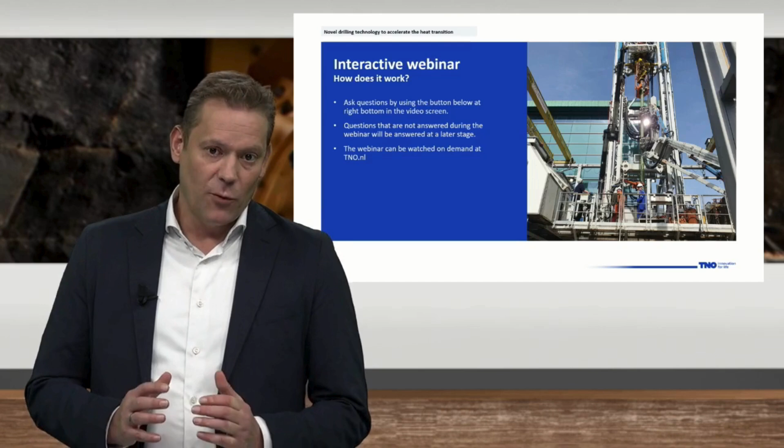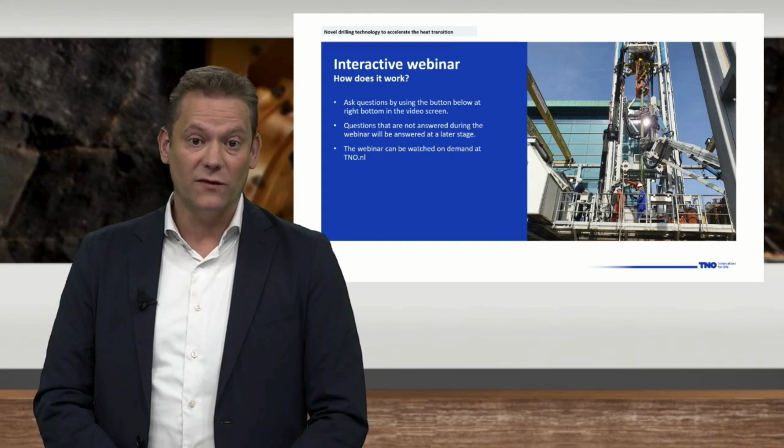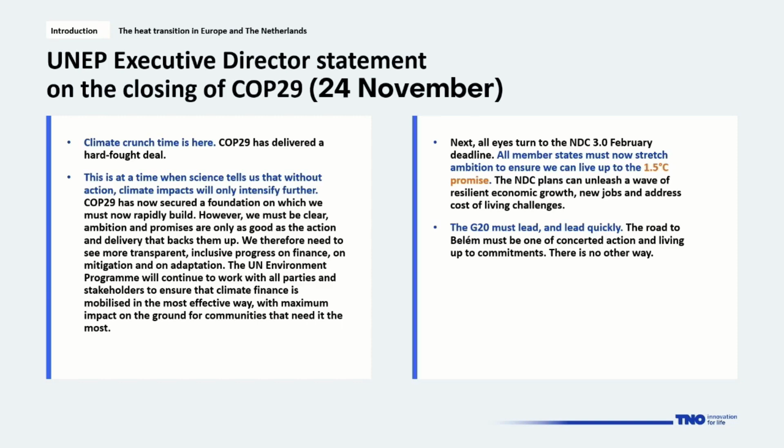So I would like to start with scoping a little bit on why we're having this webinar today, and talk about the heat transition in Europe and the Netherlands. Last week we saw the closure of COP29, and although there were some heavy debates about who's going to pay for what measures throughout the world, I think there's a general consensus that we need to take actions regarding the climate, and that we need to shift from oil and gas towards more renewable resources for our energy.

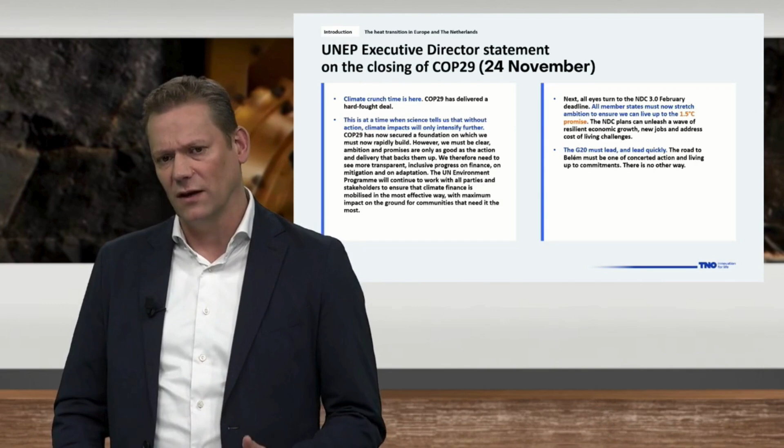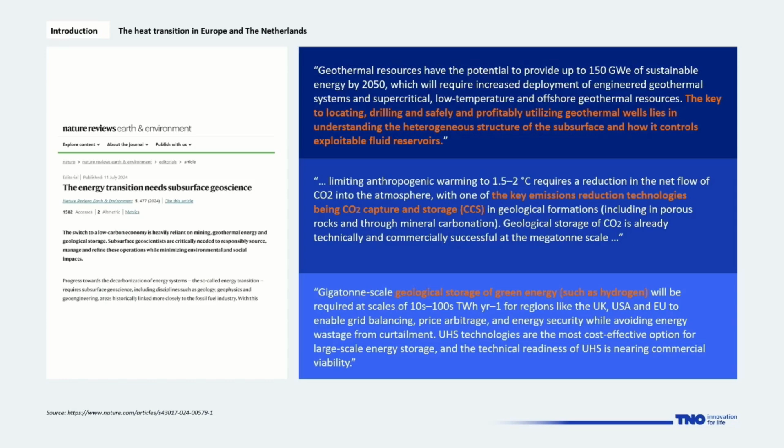With that, there was also a call for action to take steps towards the production of energy. I would like to point out this editorial paper from Nature, which clearly states that we need the subsurface, and we need the geologists and engineers who work in the subsurface to bring us all the requirements that we need for this energy transition. That can be in the part of mining for critical raw materials, but also the topic we're discussing today: CCS, hydrogen storage, the storage of heat, and of course geothermal.

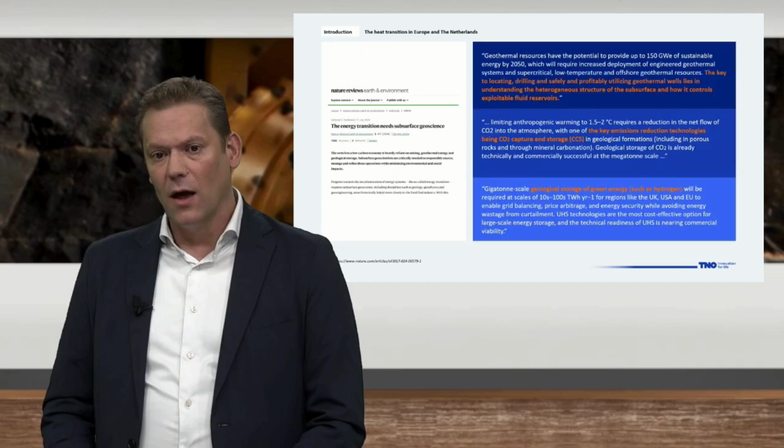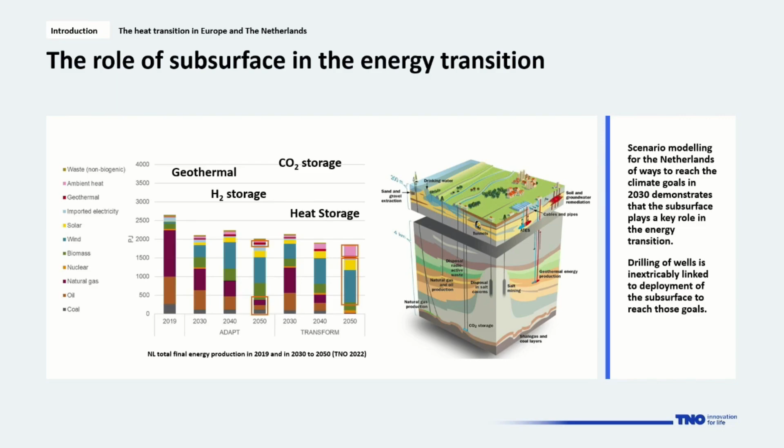We're based in the Netherlands, and if we look at the situation here, some colleagues of mine have done the modeling on what it actually takes to reach the agreed targets for the Paris Agreement. If you take the subsurface out of the equation, there's just no way we're getting towards the goals that we need. So we need the whole portfolio of options that the subsurface can offer, whether that's geothermal, hydrogen storage, carbon dioxide storage, or heat storage.

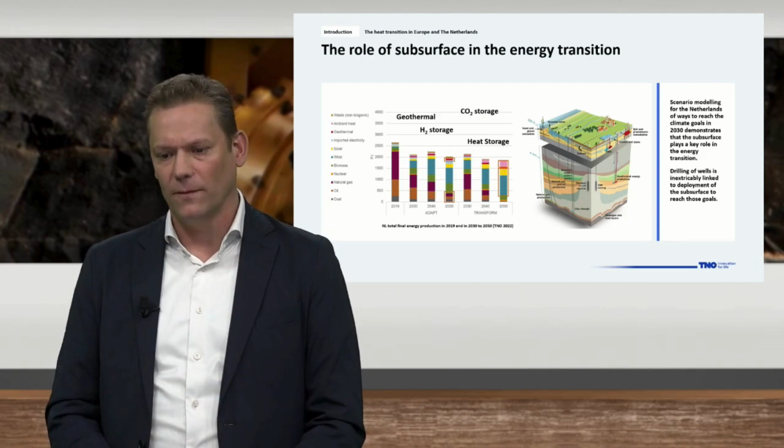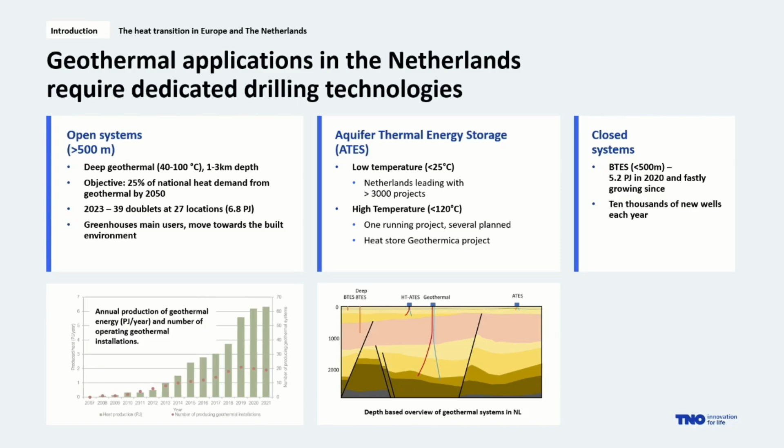If you zoom in a little on the geothermal situation we have in the Netherlands at the moment, we can see several options and technologies being deployed. On one end there are the open geothermal systems, which in the Netherlands are usually at a depth of around 2 to 3 kilometers. On the other hand, there's a major effort in developing ATES systems, the aquifer thermal energy storage systems, usually developed at a depth of around 200 meters, but sometimes slightly deeper.

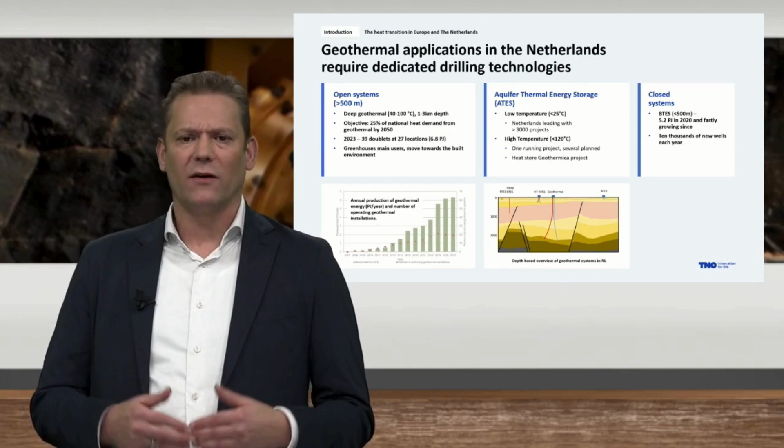And we have the closed systems, the BTES systems, developed for the most part now down to around 150 meters, though some developments take this deeper. What these three things have in common, although they're all part of the geothermal family, is that they all require quite specific drilling technologies and techniques. With that, I'd like to point out that drilling as such is not new.

We've been drilling as an industry for decades, even going back millennia, to when the first drilling operations took place in China. In recent years, we've drilled further, drilled deeper, drilled complex reservoirs, and so on.

But what we're facing now is a bit of a scope change towards carbon dioxide, hydrogen, and heat. What these technologies also have in common is that the business cases are more marginal than we're used to in oil and gas. So in terms of competition with oil and gas, for the energy transition we probably need to be more competitive in other ways, which means we require new developments dedicated towards the purposes that are requested.

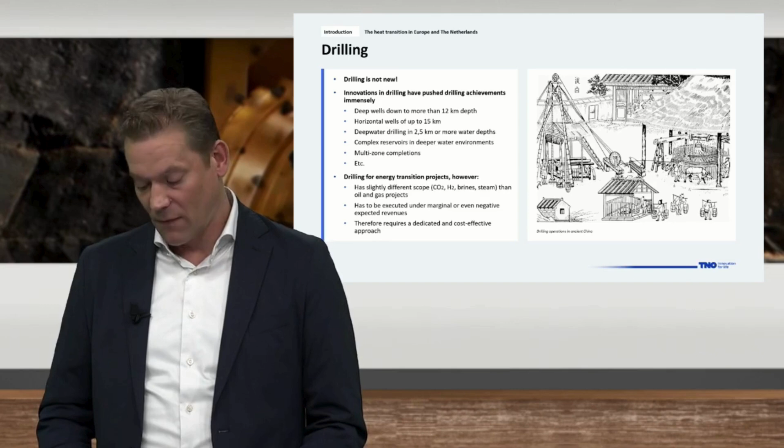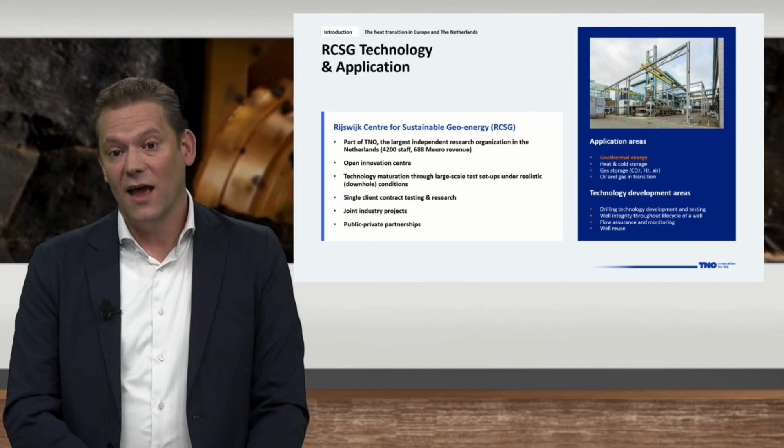So with that, I'm representing here the Rijswijk Center for Sustainable Geoenergy, and what we try to do is accelerate the implementation of new technologies for the energy transition. We do that by experimental testing at a one-to-one scale, and from that research some of the topics being discussed today are put on the spotlight. With that, I'd like to hand over to my colleague Andreas, who can take the floor.

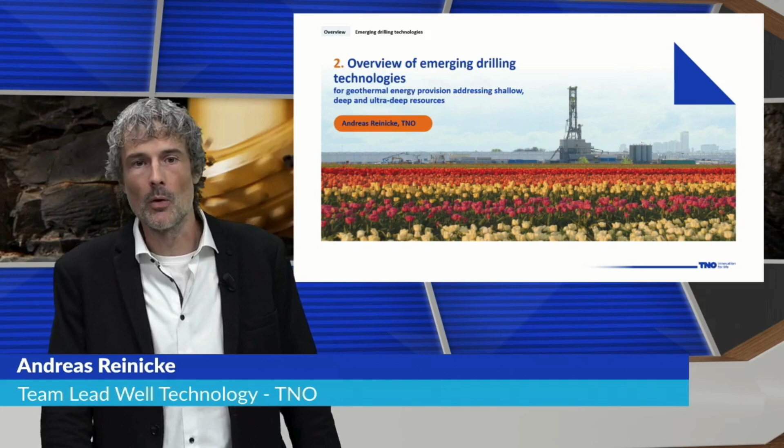Thanks, Frank. I'm very happy today to talk about the overview of emerging drilling technologies. I'm Andreas Reinicke, lead scientist for well technology at TNO. These emerging drilling technologies are really for geothermal provision and for the subsurface, going for the shallow, the deep, and the ultra deep resources.

Frank mentioned it already - we have a family of geothermal solutions nowadays. Going from very much to the left, we have the borehole heat exchangers, a couple hundred meters deep, and buffering solutions where the first hundreds of meters are used for storage of heat and then extraction of heat again. This is not classical geothermal, but we need a lot of drilling for this as well, and good technologies for it.

Then here in the middle we come to the low and mid temperature extraction - that's what we classically know, the medium depths. Greenhouses, heating of greenhouses, is a very good example. That goes to about 3 kilometer depths, really to have heat provision up to 150 degrees C. The next step, where we see quite exciting developments at the moment, is going very deep.

Drilling into the basement, into the hard crystalline rocks that we have, and developing or engineering your reservoir down there. On the one hand with enhanced geothermal systems, where fractures are created between the well bores and water circulated, or even advanced geothermal systems, the deep closed loop solutions. All this needs very different kinds of drilling technology developments.

If you're looking at the trends and the potential at the moment in Europe, there are already quite some great improvements going on. On the left side, you have a recent map of the heat and electricity production in Europe, coming from the EGEC market report 2023.

There's heat in Europe - we have now 6.3 gigawatt thermal already produced from geothermal. If you look into the Netherlands, even by area, the Netherlands is doing best in Europe.

But interestingly, the potential on top of it is even much higher. We have at the moment 0.2% electricity from special locations in Europe, and 2.8% of heating and cooling. If you look at the potential laid out in the plans for the EU, we can get a factor of 50 higher in electricity provision and a factor of 10 higher in heating and cooling.

What you have here in the center is - where is this heating and cooling output coming from? In the center we have a global review of the direct utilization of geothermal, and what you see is that industrial really is not taking off. There are some improvements, but it takes quite a while.

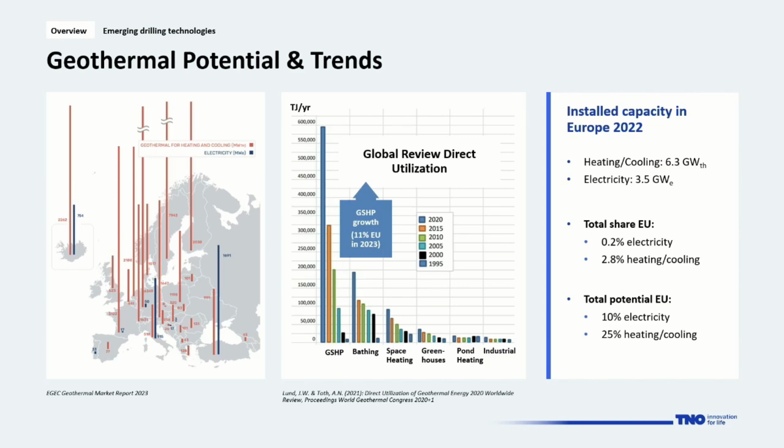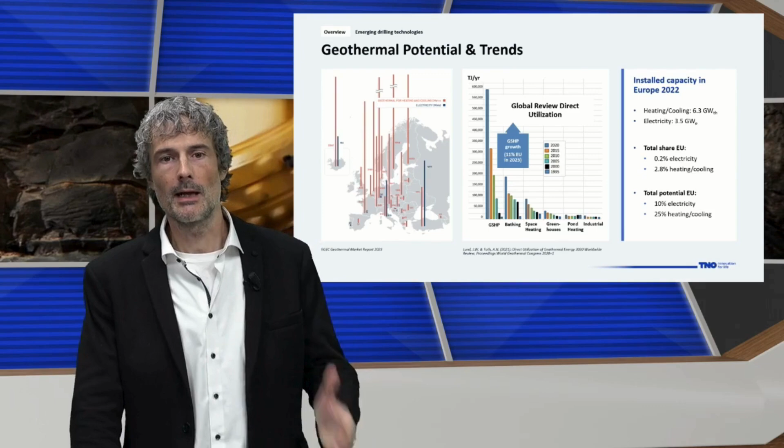Where the terajoules per year are really produced are the ground-sourced heat pumps - the shallow to mid-depth systems. A lot of them are really shallow drilling, borehole heat exchangers installed, and from there these terajoules are produced. If you look at these numbers, these are millions of meters that have been drilled and need to be drilled in future as well.

Let's look at the challenges of shallow and medium depth resources. Yeah, for shallow resources, the drilling itself is not difficult. This is fast, well known, and relatively cheap, you could say.

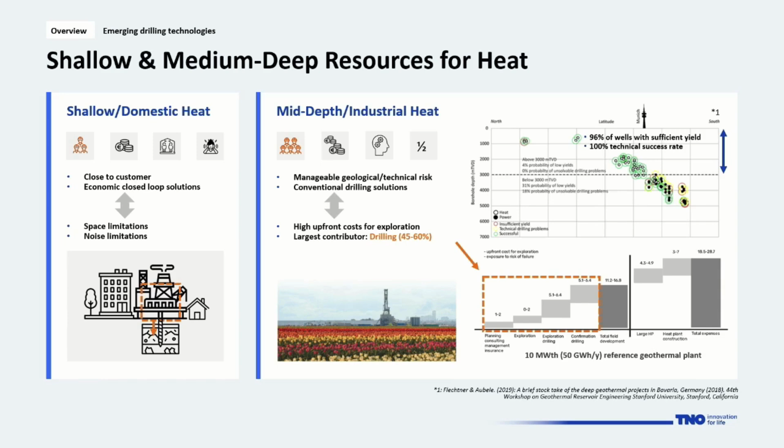But the challenge here is the space limitations. Quite often you're in an urban environment where you need your heat, and you need to put your rig somewhere. You also have noise limitations, you cannot operate during night usually, so you need to take that into account. You want electric-driven systems for your emissions, and you have silent drilling systems as well.

Then for mid-depths, the space usually isn't the challenge anymore. But the challenge is that the costs are getting up. This is much more an oil and gas type of drilling operation, to mid depths, let's say 3,000 meters. What you see in the lower right bottom graph is that by the point you've proven your resources with confirmation drilling, already a couple of millions are spent, and the drilling itself is about half of these costs that you have to spend. So that's obviously where we can improve.

On the other hand, the good thing for these mid-depths, and that's why we focus so much on it, is that most of the wells drilled in that region down to 3,000 meters have sufficient yield. So you have resources you can efficiently produce, and technically we can drill there. There's an example from Munich, where 100% of the wells have been technically realizable.

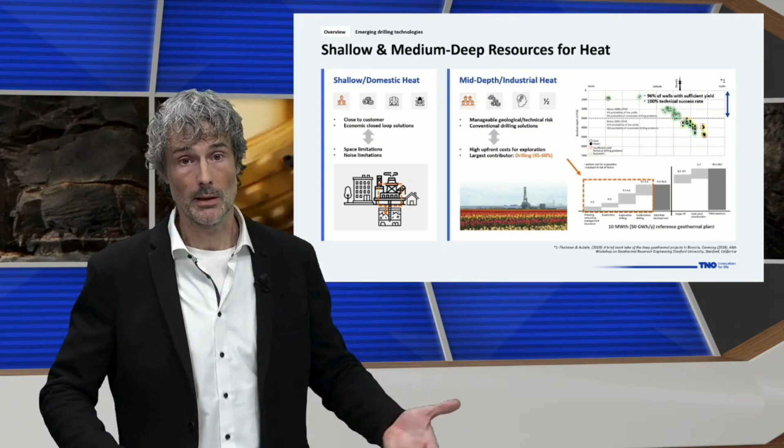That percentage goes down if you go to deeper resources, which brings me to my next point. These deep and ultra-deep resources are quite an interesting arena where there's a lot of focus. On one hand, technically drilling them becomes much more difficult, so the technical risks are really going up, the upfront costs are really going up, you need much more people, and actually much more expertise to go there.

But we are going into that arena of geothermal anywhere, getting much more independent from our location. Interestingly, you bring your levelized costs down for such a system if you can effectively, technically drill to that depth. I have two nice examples here from two papers - the upper one is from advanced geothermal systems, the lower one from enhanced geothermal systems. I'll start with the lower one, a recent study from the US.

Looking at that, the first one is 1 kilometer depth, and if you take $100 per megawatt hour as a threshold, there are only a couple of tens of sites where you could drill economically. But if you go to 4 kilometers or 7 kilometers, deeper, then you shift to much more economic solutions, and you go to tens of thousands of potential sites where you could actually develop it economically. That's the same for AGS.

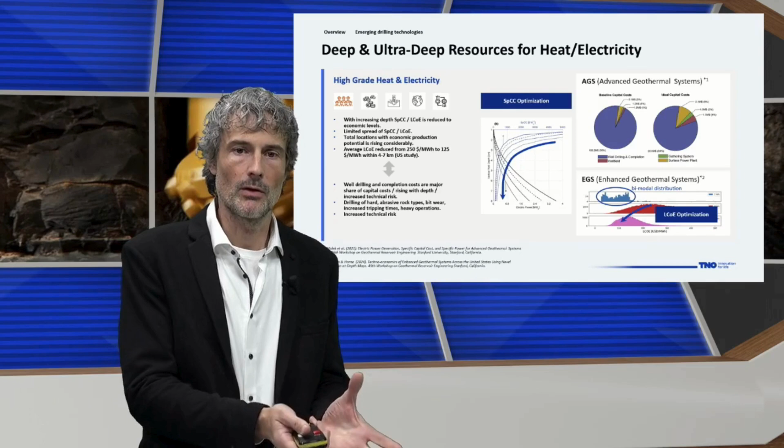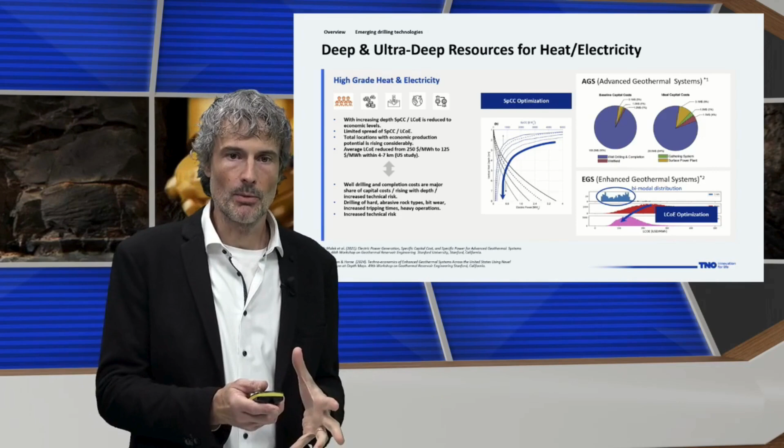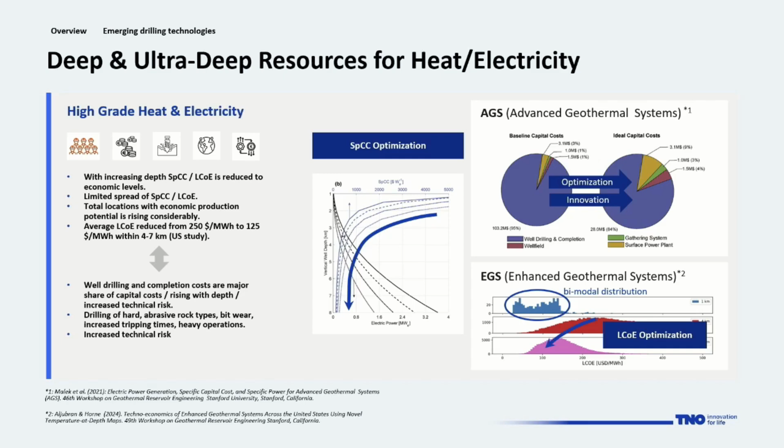In principle, if you can construct that, if you can drill that technically, then we're bringing - as you see in that curved blue arrow - the specific capital cost of this installation down, and narrowing the spread. So really coming to solutions you can do in almost every site. Obviously these costs are high, we're talking about $100 of millions that you need to invest upfront. There's a lot of optimization and innovation coming into that, to help bring costs down and make this drilling more efficient.

Let me talk about some of these emerging technologies. I'll start with shallow again, with the ultralight and light drilling rigs. Very interesting developments ongoing for the urban area.

Then it fills up a container, pulls it out, empties the container with the debris, and goes back into it. Their concept is really slow, but it's cost efficient what we're doing here, and it's very compact for the urban area.

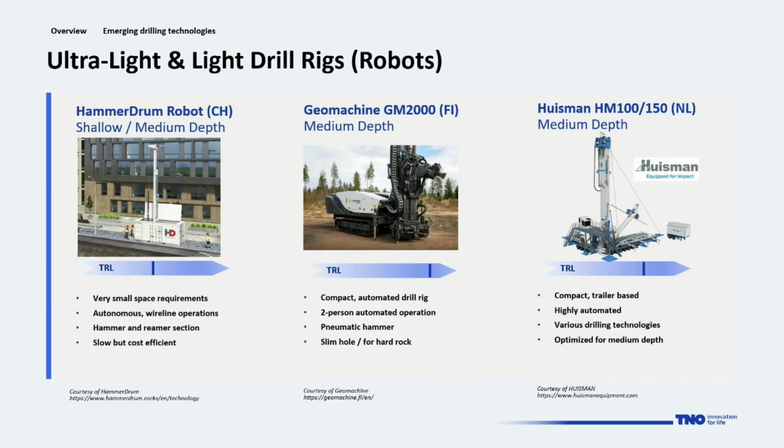To the right, there's Huisman. Then we're going more to the design of a real oil and gas drilling unit type, but everything compact on one trailer. One big trailer, this is your rig, this is what you need for your drilling operation, complete with well control, with your platform on top of it. They can integrate even different drilling technologies with a specialized top drive that they have developed for this one. And this is really optimized for medium depths, in the city, so in urban areas, fully electrified system.

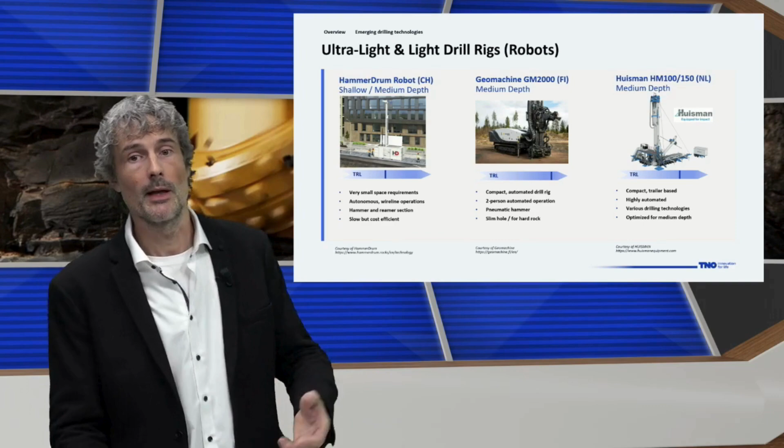Now let's move from the medium to really the deep. Hard rocks, the crystalline rocks. And there you have a whole world of so-called novel hole-making technologies, developments or projects that are upcoming with new systems for how you can remove your rock in front of the bit.

This is percussion drilling. Percussion drilling is known, is very effective for up to mid-depths, with these air-driven hammers. It's used a lot as well, but the big challenge is always how do I bring that to depth? How do I work with drilling fluid? How do I work with mud? I have here 2 projects I want to present.

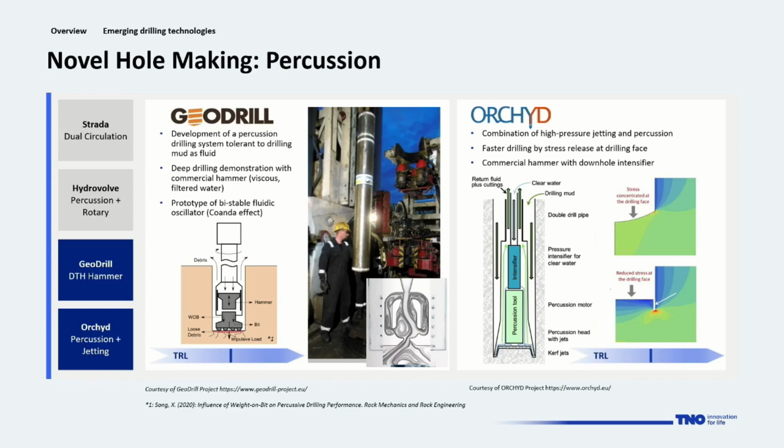One is GeoDrill, one is Orchyd. GeoDrill really looked into removing all the valves that you need in such a hammer system, a mud-driven hammer system, completely, by focusing on the so-called Coanda effect. That's a fluid oscillator that produces the pulses that you need for your hammer downhole, without any valves in it. They brought that really to the prototype level, tested in shallow depths.

Then Orchyd, another very interesting project where they combined 2 systems - they combined a commercially available hammer with a high-pressure jetting. It had a downhole intensifier to jet a groove around your hole bottom, releasing the stresses of the hole bottom and making the hammer much more effective. Again, they could really show that - bring these type of systems to the prototype level. Both projects are recently stopped, but there might be more coming with these interesting percussion drilling systems.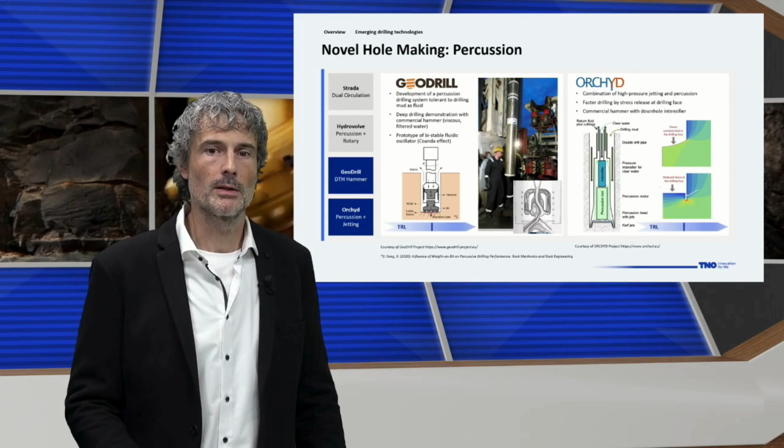Another very exciting novel hole-making system is based on pulse plasma or electropulse drilling. Important here is the word pulse, because it's not a continuous plasma burning at your hole bottom. No, it's pulses of plasma, like a flash, that is happening.

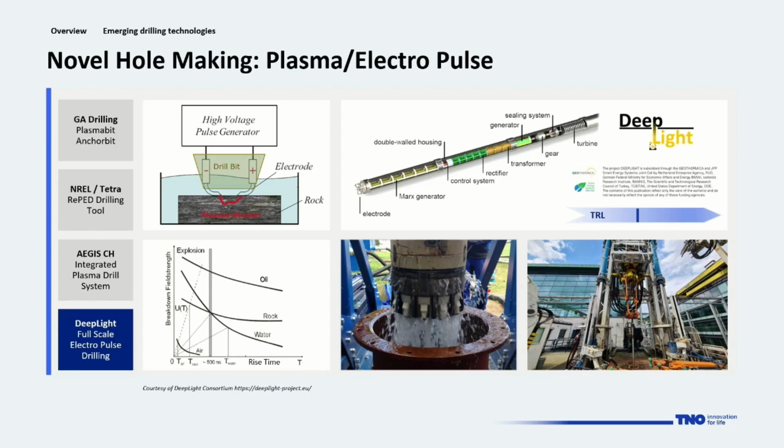So you need to switch fast, below 500 nanoseconds, and you have these very high voltages of 500 kilovolts that you need for it. We are working in a project called DeepLight. DeepLight is really looking into the full integration of this pulse plasma generation in your bottom hole assembly. So you have a turbine, a generator, a transformer and a pulse generator - you have that all in your bottom hole assembly. So it's not a cable that you're running from surface. You have that downhole and take your energy from your fluid mud that you circulate.

You see here two pictures. One is a shallow test where the prototype was tested for drilling. The other one is our full-size rig that we have at TNO, and as part of the Deep Light project, we want to integrate that type of drilling system with our rig in a full drilling operation.

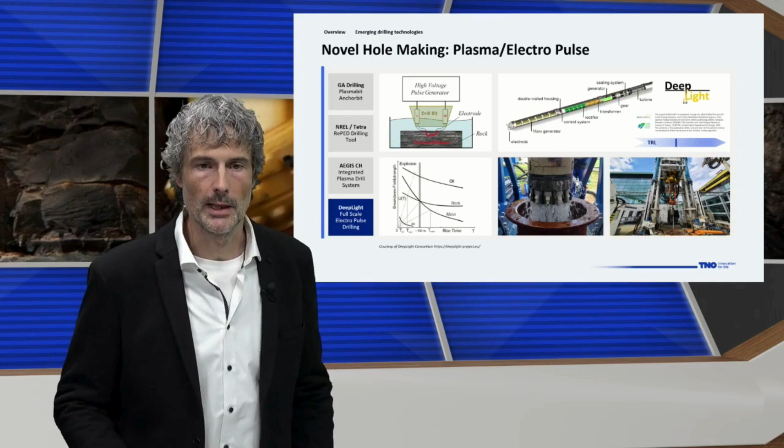Next is novel hole making: steel shot drilling, a kind of abrasive jet drilling, you could say. There are two exciting projects that are really ongoing at the moment.

Steel shot drilling works like this: you have your nozzles in your drilling bit, and an accelerator shoots the steel shot, which is high density, and hammers on your rock, creating fractures. Your high pressure fluid can enter and propagate those fractures, and then the shear forces remove the cutting. So these steel shots enhance or modify your hole bottom.

So you have novel directional control, higher ROP, and enhanced bit life from this combination of these two drilling technologies. With that, there's an effective way of producing multilaterals, increasing your productivity and producing much more resources than we can do nowadays.

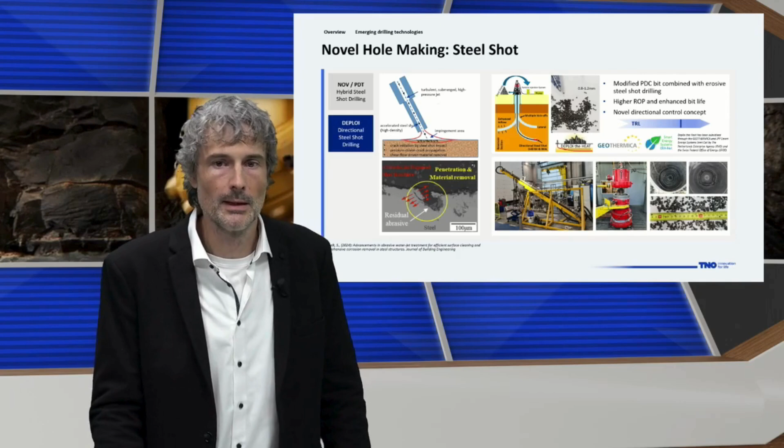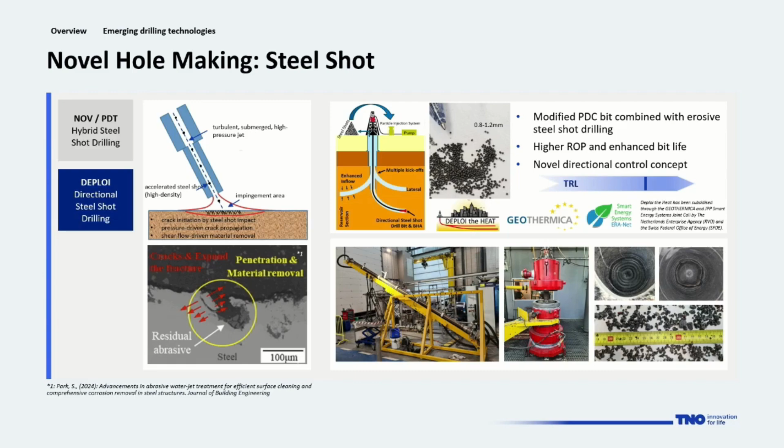We tested that in our labs, for instance in the cuttings flow loop. We see here pictures showing what it means to transport these steel shots in your drilling fluid. We tested it as well in our drilling simulator, the red vessel here, a big vessel where you can drill into rocks under pressure.

This brings me to an overview of these drilling technologies. You see now many more names than the technologies I talked about, obviously because there is more, and I needed to pick some where we're involved as well. Let me start here in that overview.

Let me start on the right side with the electromagnetic wave technologies. You have Quaise and DeepU, two active and quite innovative projects. These projects really take your energy from the surface. With Quaise it's microwave, with DeepU it's laser, taking it from the surface, bringing it downhole, and doing your drilling through a melting and spallation process downhole. They're both early stage, and there are quite some challenges to get your energy there, but it's very interesting to have such different concepts of hole making.

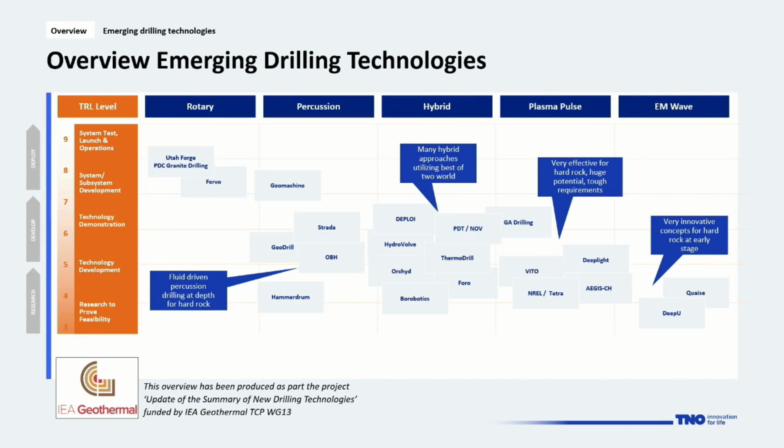Then we have plasma pulse. I mentioned it. There are several projects going on to have these advantages of this system: an effective rock removal mechanism plus improved bit or electrode life, combined really for drilling long well bores in hard, crystalline rocks. They're ongoing, and many of them have brought it to the prototype stage.

GA Drilling - Liam will talk in a couple of minutes about their specific technology. They're working on plasma pulse as well, but they're doing even much more with a fully integrated system for drilling geothermal anywhere. Then hybrid in the center - a lot of technologies, obviously, because hybrid combines the best of both worlds.

You see here a lot of PDC, so existing PDC technology combined with a different drilling mechanism like steel shot. Jan Jette will talk more about it, but as well combined with jetting, with laser, and with percussion as well, which could be interesting in a way.

And then the percussion world - I mentioned already, percussion has been out there for a very long time and is very effective for air hammers, or pneumatic hammers. But bringing percussion really to depth, you need to go for liquids, for drilling muds, and that's still ongoing - various projects have brought it to the prototype level. Let's see where this is going, because it is a challenge, but there are some new aspects like the Coanda effect, which works completely without valves, eliminating one of the big problems of having percussion downhole at depth.

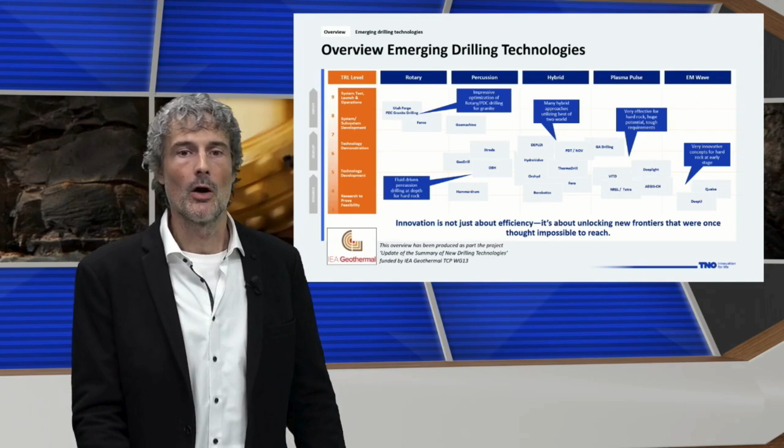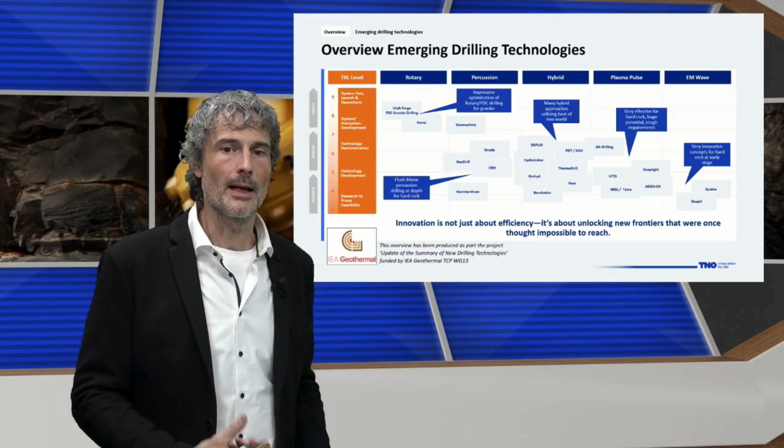But I'd say innovation is not only about efficiency, that's a big part of it, but it's really about unlocking new frontiers, to see where can we be and how can we get there with our new technology, to open up these new frontiers.

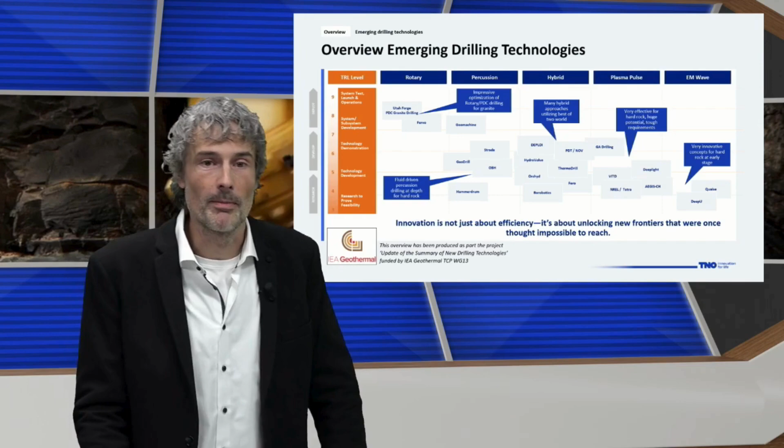Believe it or not, 50 years ago the PDC bit, they started as well, and they needed to develop that about five decades ago, and really started with single cutter testing to see if such a system can survive at these conditions.

And what you see here in this overview is really coming from work that we did for the IEA Geothermal, together with IEA Geothermal, who funded this type of work to get an overview of emerging drilling technologies for geothermal energy provision. There's an IEA report upcoming next year as well about that.

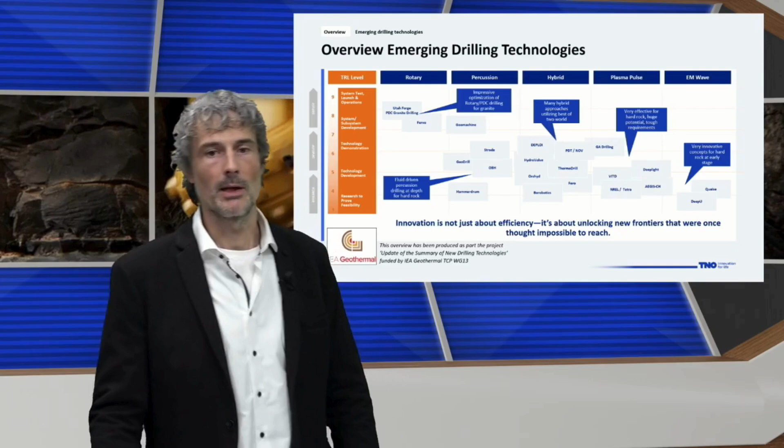With that, thank you for your attention, and back to Frank. Thank you very much, Andreas, for a very interesting talk.

We have some questions coming in, so I'd like to invite the audience to put in more questions. First question on the list: if you would have to put your own money into one of these technologies, who's given this great overview, where would you put it, Andreas?

Yeah, thanks, obviously a very good question. I would definitely focus on a hybrid solution, because there's already so much progress ongoing with PDC bits, and this is such a developed system, for two reasons. On the one hand, you can make that much better with a different hole-making technology that you add to the already existing one, getting more reach, enhancing your bit life, enhancing your rate of penetration. On the other hand, you're not changing the complete world - you can hook up your system to existing drilling operations. So that makes it so attractive to focus on a hybrid, combining it with PDC drilling technology and adding an additional mechanism to make it more effective. I would go for that.

Thank you very much. Another question - you mentioned medium depth, can you define that? For example, you mentioned the Huisman rig, how deep could that go?

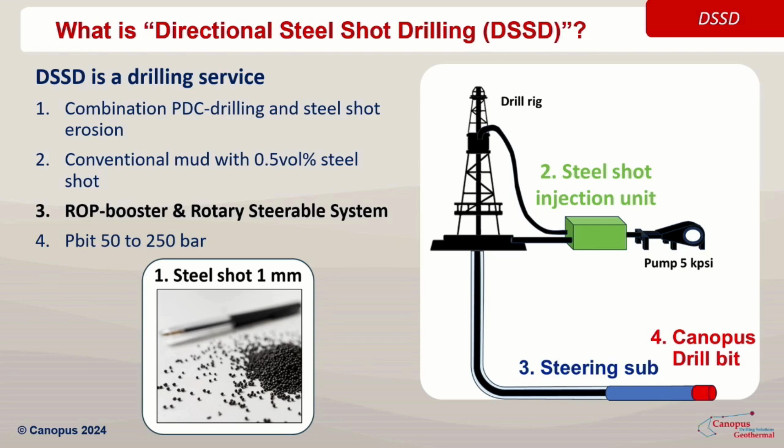The components of the technology are steel shot, combined with PDC drilling. In the first picture you can see the steel shot particles - they're pretty small, and we selected them based on the hole cleaning capabilities. You have to add something to the mud, but you still have to circulate it and keep the well safe during the operation. Then you have to control the concentration pretty well as well.

We keep it to 0.5 volume percent, done by a completely automated steel shot injection unit. By keeping it at this low concentration, smaller than the usual cuttings concentration in the drilling mud, we minimize the burden - this is the only burden to the drilling system compared to conventional drilling systems. We can use any conventional mud with this. The particles travel through the drill string and reach the bottom hole assembly, which consists of a steering sub and the Canopus drill bit.

The steering sub is effectively a rotary steerable system, which has many advantages. By being able to rotate the string, you have better hole cleaning and better reach of the system. By the method I will describe in a minute, we can make this rotary steerable system, which is notoriously expensive, much lower cost, so we can apply it in shallow drilling operations and any drilling operations for any depth. It's also an ROP booster, I will come back to that.

Important to stress that the pressure bit drop is, in our case, around 50 to 250 bar. There are other jetting systems that don't use particles and go to very high pressures. We want to differentiate from these with the 50 to 250 bar pressure range over the bit. We don't have to modify the usual drilling systems used on drilling platforms, which is a big advantage from an operational efficiency point of view.

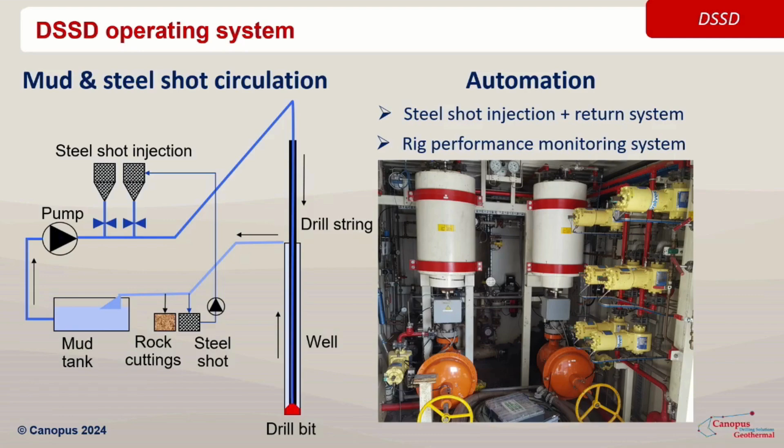The mud and steel shot circulation system is shown in the diagram on the left. It is important to keep the mud tank and the pump free of steel shot particles, so we inject the steel shot particles after the pump when the mud is already pressurized, and remove them from the drilling mud just before it reaches the mud tank. We remove them together with the rock cuttings and separate them by a magnetic drum separator, then re-inject them, so the steel shot circulation system is closed, as well as the mud circulation system. But the mud tanks and pumps don't see the steel particles.

We prefer the injection system to be automated because it is at enhanced pressure and you don't want an operator to be next to it.

Apart from that, we also monitor the rig performance closely, because we want to balance the erosive action of the bit with the mechanical action of the bit. The only way you can do that is by closely monitoring the rig system and using that as an input for the steel shot injection. So this is also a next-level drilling automation system, which the oil and gas industry have been struggling to implement. That's another interesting story, but not for now.

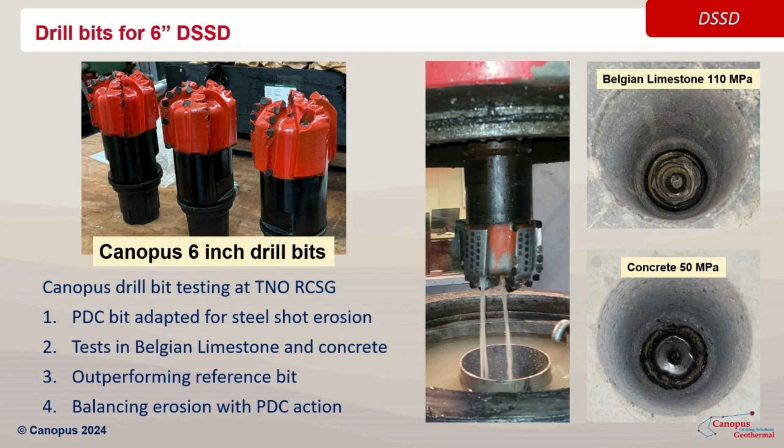We have done tests in limestone and concrete. Concrete is simpler, but with limestone, which is nice and hard, you can do a reasonably better controlled ROP test. On the top right hand side you can see the borehole drilled in Belgium limestone, and you can see how smooth the borehole wall is, high quality. Also in the softer concrete, the borehole quality is great, and you don't see any particles embedded in the wall. What you can also see in both pictures is that the hole bottom is not the typical nice regular groove you get with a PDC bit, but you can see the impact of the jets that help out, making the hole bottom a bit more irregular, giving much better control grip of the PDC cutters on the hole bottom.

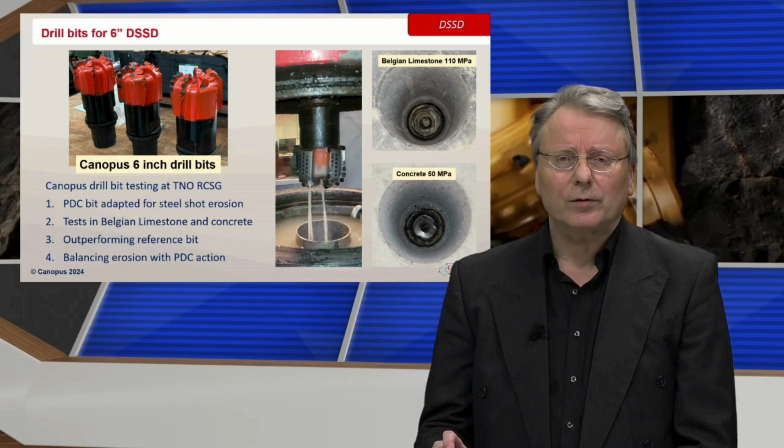You can also see in the long vertical picture in the middle that the jet configuration is asymmetric, and that's important for the steering mechanism, which I will describe in the following slide.

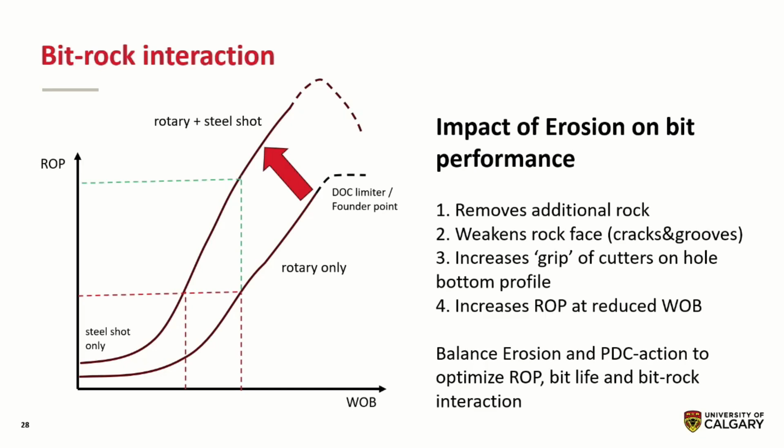This slide goes a little further on the bit-rock interaction, which is extremely important for the rate of penetration improvement, especially important for hard rock drilling. This curve has weight on bit on the horizontal axis, and rate of penetration on the vertical axis. It's a very popular way to describe bit efficiency for oil and gas wells. What you can see for rotary only is an inactive area, then a steep incline of the performance, and at the end you reach the depth of cut, the DOC, where you have consumed all the length of your cutters and cannot go faster.

When you add steel shot to the system, you remove rock because of the erosion itself. That increases the ROP on top of this ROP, but it also weakens the rock face, as described by Andreas in his presentation.

Like I mentioned, that increases the grip and that increases the ROP. If you look at this graph, you can see the curve for rotary and steel shot is moved to the left compared to rotary only, and the founder point is increased as well. How far you can move left and up isn't clear yet, but we've done a number of tests and want to connect that to a theoretical model to explain it.

In the lab tests we conducted with the drill bit test facility of RCSG, we've seen that for softer rock we can go a factor of 2 or 3 higher, and for hard rock it was even above a factor of 5 faster rate of penetration, depending of course on the settings of weight on bit, torque on bit, RPM, etc.

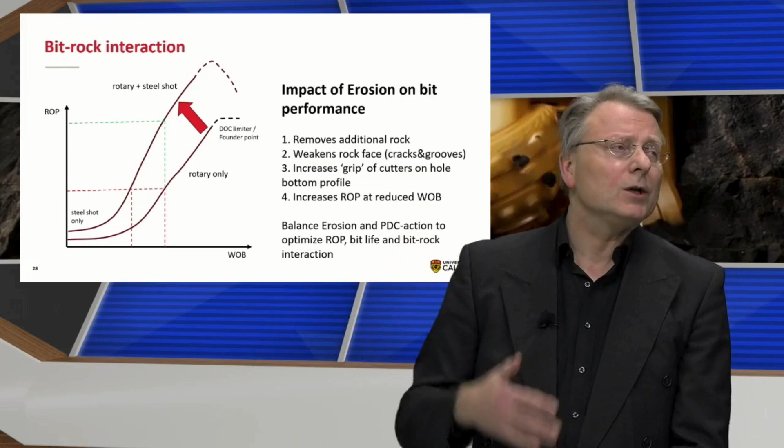It's definitely a big improvement on rate of penetration, but ROP isn't everything. Like Andreas mentioned, bit life is extremely important as well. You don't want to drill very fast for 10 minutes — you want to drill sufficiently long to complete a whole hole section in one go. We're working on that, and how much of an improvement it will be will be reported in publications next year at various conferences.

Then the steering sub. Again, it's a rotary steerable system, meaning the complete drill string is rotating, the bit as well. The bit has asymmetric nozzles, so if you have a device that changes the continuous supply of steel shot particles to the bit into a pulsed concentration, and correlate that to the rotation of the bit, then you can ensure you erode more on one side of the hole bottom than the other.

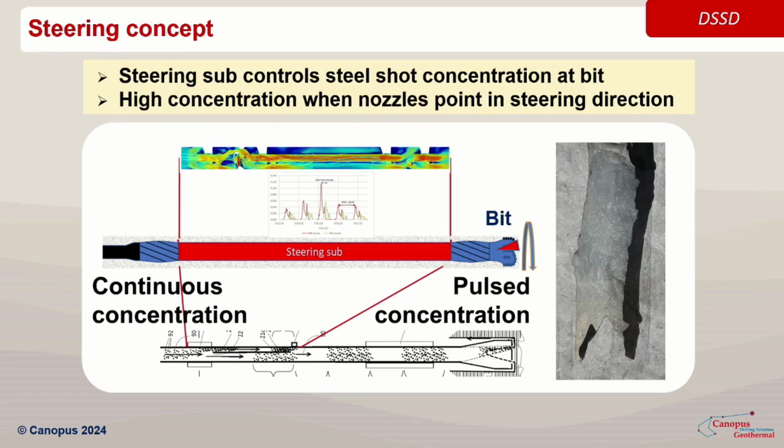And then you have a steering effect. It's as simple as that, and that's what we're building and testing at the moment, which we also tested in Switzerland last year. We drilled a few bends in that Swiss mountain, confirming that the system works, and now we're building the first field tools.

This system is very energy efficient, which is an indication that you need minimal energy to steer, and that indicates much reduced wear compared to when you try to steer by manipulating torque on bit, weight on bit, with huge forces — which requires very expensive systems that are hard to maintain on the rig side. That's why we think this is such an effective, simple, but very accurate steering system.

Just a quick description of the drilling assembly type we have, especially for shallow drilling, which I'll come to in a few slides. Up to 500 meters, you can go from the drill pipe directly to the drilling assembly. The total length is about 10 meters. The flexibility of that assembly determines the build angle we can drill. We can make it as flexible as we want, but for many applications, a 10 degrees per 30 meters bend is pretty effective and nice to have — that's what we're focusing on right now.

The steering action is much faster, as you could see on the slide with the steering sub — you can turn 90 degrees within 3 meters, but of course the assembly cannot follow that tightly. This is yet another difference from oil and gas field drilling, where the assembly stiffness determines the flexibility of the curves, not the steering action.

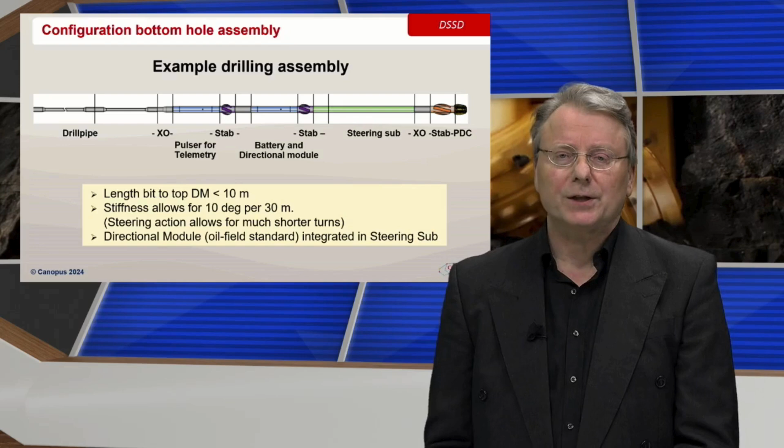Very quickly, two slides on where we think the impact of the technology is very clear. There was a study done by TNO and KBEnergy on the Slochteren formation. On the top right-hand side, you can see the transmissivity map of that formation. When geothermal becomes economic for the Slochteren formation, you need a transmissivity that is yellow or turning further red. There isn't that much yellow in the graph on the top right.

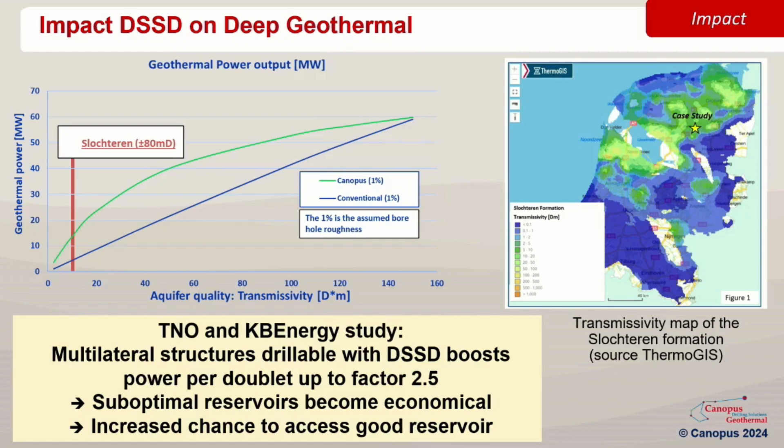By drilling multilaterals, which has already been proven in the Paris Basin and in München, we can be extremely effective at boosting productivity. With DSSD technology, we can drill multilaterals that conventional technology cannot drill, and then we can move the economical map of the Netherlands for the Slochteren Formation from yellow to blue, which opens up quite a lot of geothermal projects.

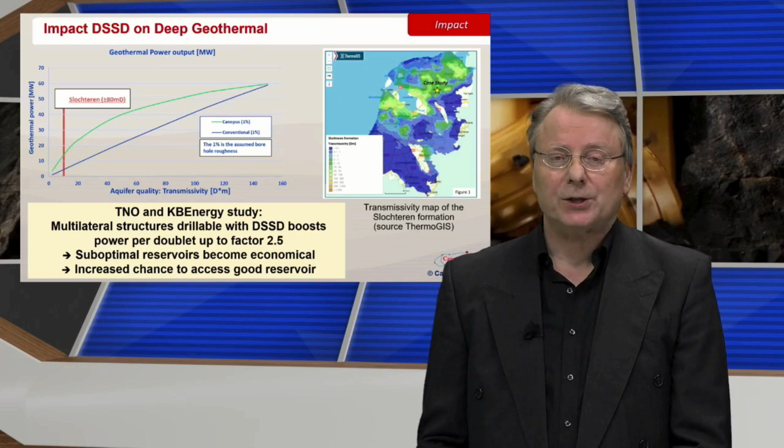Of course, when you have multilaterals, you also increase the chance of accessing good reservoirs, so the risk of developments is reduced as well.

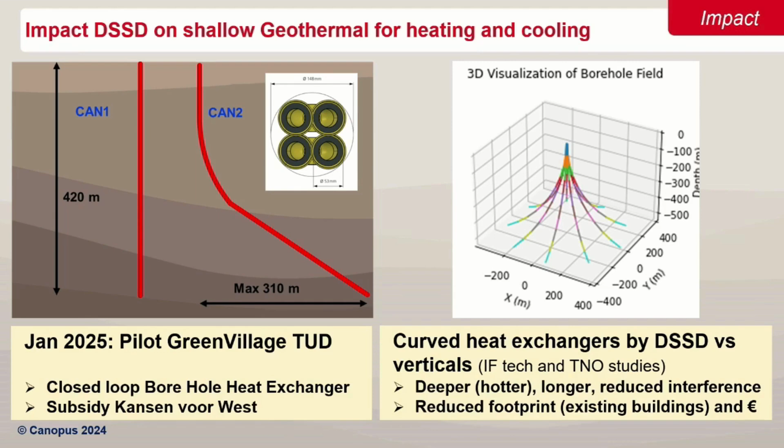For shallow, we will have a drill test, a pilot in Delft by the end of January. There we will drill two borehole heat exchangers, a vertical one and a curved one. What we want to demonstrate is that the curved one will produce much more energy than the vertical one, and that we are able to drill such a curved borehole heat exchanger. It's a closed system—you can place one or two U-tubes on the inside and circulate only through that. It's not an open system, so you don't have any interference with the surroundings.

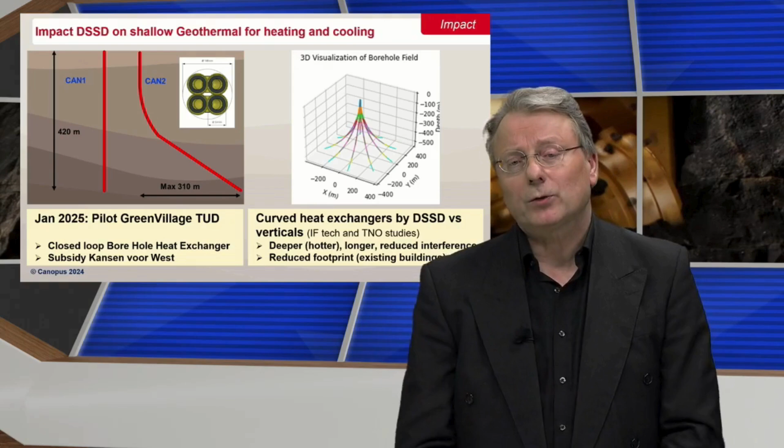Why do we think this makes a big difference? If you look at what a group of curved borehole heat exchangers can deliver in terms of heating and cooling, the length is longer because you can steer. You know you're not going to collide with other wells. Even better, you can drill them away from each other, which reduces the interference between the several borehole heat exchangers—giving you additional length.

You drill deeper than the normal 150 meters that Frank mentioned. We go up to 400 or 500 meters depth. That means you also have a higher temperature that you can produce for heating.

If you add up all these factors, with only 5 or 10 of these borehole heat exchangers drilled from a smaller location, you can produce as much energy as 50 vertical conventional borehole heat exchangers. A big impact, and that's what we want to demonstrate in Delft.

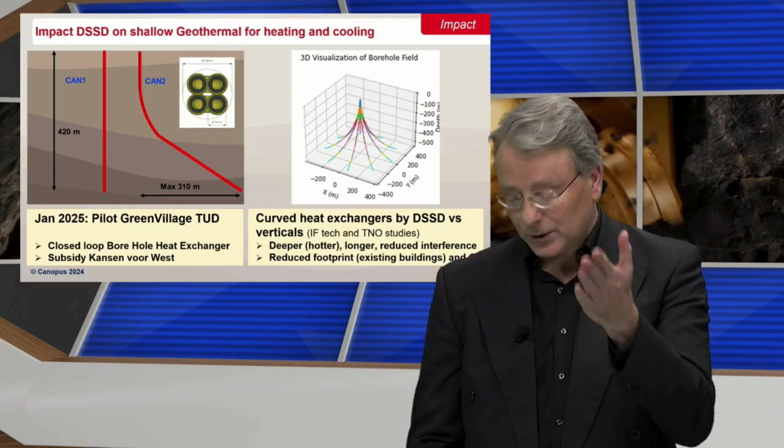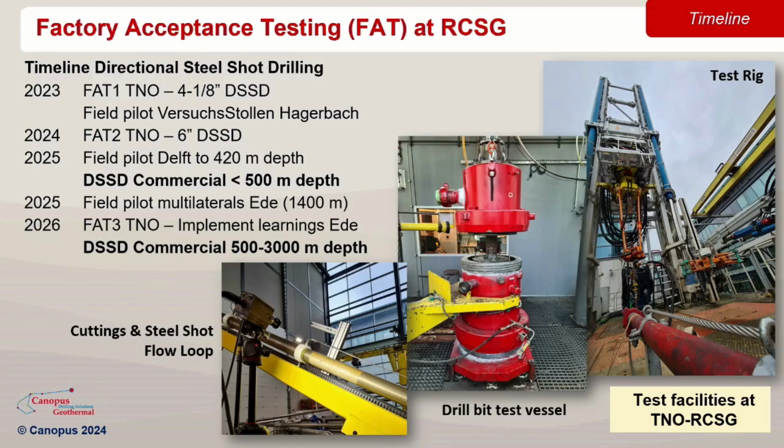This is the last slide. I want to give a brief overview of where we are with the technology. Thanks to all the factory acceptance testing we did at RCSG, we have de-risked the technology so that, alongside the pilot in Delft, we can have the first commercial shallow drilling operations. We expect to be able to do up to 500 meters depth next year, and in '26, after a field pilot in Ede—lined up as part of the Deploy the Heat project—we expect to be commercial for 500 meters to 3 kilometers depth of drilling.

You can see the nice pictures of the RCSG facilities: the cuttings flow loop and the steel shot circulation tests done there, the vessel with the drill bit testing, and the rig where we did the full assembly testing.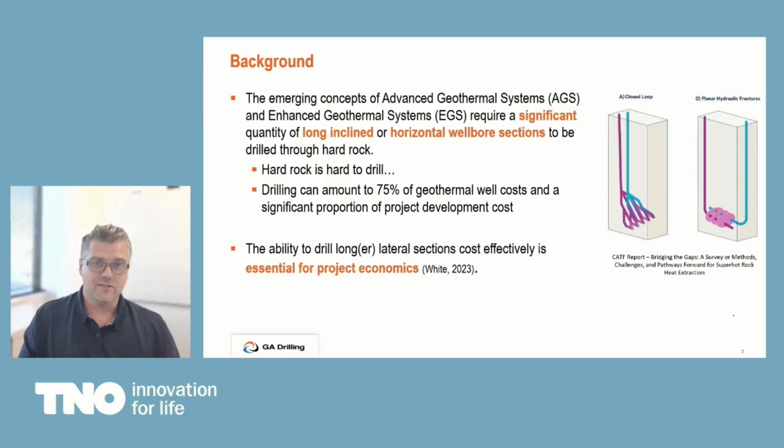The ability to drill longer lateral sections cost effectively is really key to project economics.

So we've mentioned these great pilot projects. In the US, we've got Fervo drilling in Utah, indicated by the blue star on the heat map on the left. And then you've got Eavor in southern Germany and Europe, drilling indicated by the red star towards the middle of the screen.

What's important is that to scale these projects, you need to be able to drill deeper. So if you look at these heat maps, the upper ones are showing temperatures at about 15,000 feet, 5 kilometers deep, and you're looking at the orange areas. That's where the reservoirs are around 150 to 175 degrees C. That's where people are typically targeting. You can see that those areas are limited, and at those sort of depths, it's less than 3% of the Earth's surface.

What we want to do, what we are doing, is making it possible to drill to 33,000 foot, or 10 kilometer deep wells. And when you do that, you can see how the accessibility to those sort of reservoirs really takes off, and that's what we're enabling. That's geothermal anywhere. That's where 70% plus of the Earth's surface can get access to the types of reservoir heat that you need to make these projects economical.

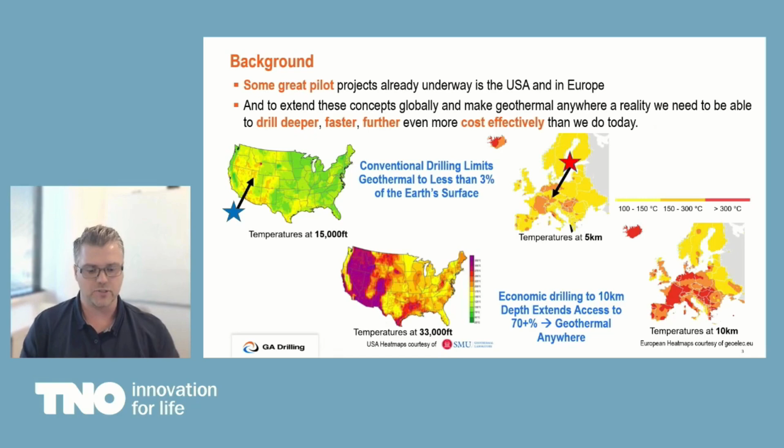So geothermal wells occur in hard rock, ultra high strength hard rock, 30,000 to 50,000 pounds per square inch of compressive strength. That's around 200 to 350 megapascals, which is 2 to 3 times stronger than most hydrocarbon reservoirs.

High strength rock, hard rock, is typically associated with high well costs. Why? Because it requires a lot of energy to drill, and energy, when it comes to drilling, scales with the strength of the formation. Typical drilling technologies can be limited in how much energy they can get down there at the rock face. That results in slow drilling, more drilling days, and ultimately more cost. Time is money. In addition, you have drilling dysfunctions which will damage your downhole tools, wear out your drill bits, and result in poor drilling efficiency.

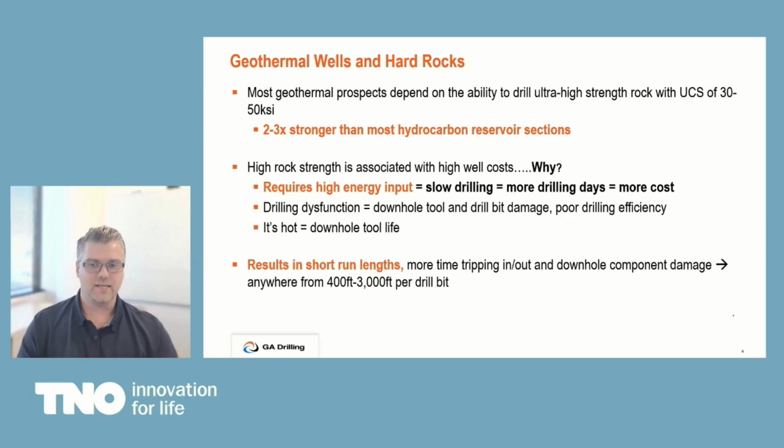And then lastly, but not least, it's hot, right? That's why we're there, and that can have a big impact on tool life and reliability, but ultimately results in short run lengths, meaning you have to trip in and trip out to replace damaged or worn components. That results in short run lengths of about 400 feet to about 3,000. You're seeing a lot of improvements now in conventional technologies getting those run lengths up, but as both Jan Jette and Andreas mentioned, the target here is to drill these long sections in one run.

Now, if you look at the business end, the drill bits, and we talked a little bit about hybrid technology, it comes down to getting the energy, maximizing the energy at the drill bit to destroy that rock. And what it comes down to is torque and speed. Torque comes from the cutters, right, those black things on the face of the drill bit. Nice image of a fixed cutter drill bit that's now pretty synonymous with hard rock drilling.

It comes down to getting those cutters engaged with the rock, and you do that by applying a force. Now, when it comes down to soft rocks, like a soft sandstone, the rock doesn't push back as much, so to get that depth of penetration of the cutters into the rock requires less force than it requires to get that same depth of penetration into a hard rock like granite. That means you need a lot of weight, a lot of force - in drilling terms, that's called weight on bit. The ability to get the weight, to get the depth of cut, to get the cutters engaged, and then turn the bit is what dictates your rate of penetration, ROP, or how fast you drill.

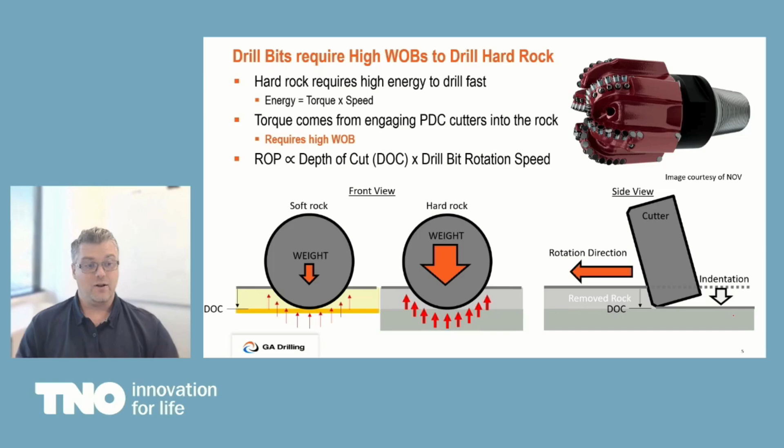So to drill fast and also to maximize the life of the cutters, you need to have a high amount of weight on bit.

Now, a really nice example from guys that are out there doing it today - this is from Fervo in Utah, published earlier this year at the Stanford University Geothermal Conference. The quote: granite rock, renowned for both its rock hardness and its abrasion, poses a unique challenge where extremely high levels of friction impede the ability to transfer weight to the drill bit, and simultaneously, you need more weight than typical oil and gas applications to drill those hard rocks effectively.

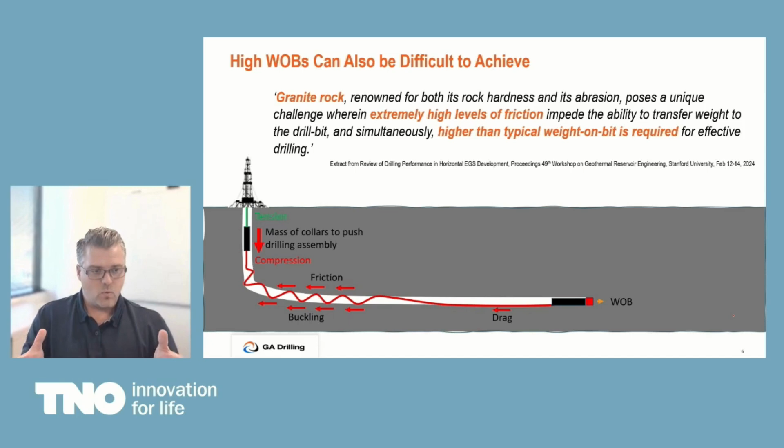So when you look at the section of a wellbore and the drilling process, your weight is coming from the vertical section, and you're putting compression into all of that drilling assembly or drill pipe beneath that point of weight to get the weight to the drill bit. So when you do that, you have compression, things like sinusoidal or helical buckling that can happen, and drag of the drilling assembly on the formation. Friction factors in granite are a lot higher than in conventional reservoirs. That robs the weight on bit, so you end up needing more, but you can get less in these applications.

The solution brings us to our first technology: the downhole anchoring and drive system. This system is placed just above the drilling BHA. It has elements in there which expand to grip the rock, and it uses hydraulic energy available down there to apply weight by reacting into the rock to the drill bit. This ability to create weight on bit downhole directly above the drilling BHA helps eliminate that buckling, because now you require less weight from the vertical section.

You can also pull everything along using this system. It allows a lot more weight to reach the drill bit because you don't have that buckling anymore. It can apply more weight on bit. It also allows extra control of the drilling process because you're right there at the drill bit within 100, 200 feet. You're able to sense what's going on and change the weight accordingly.

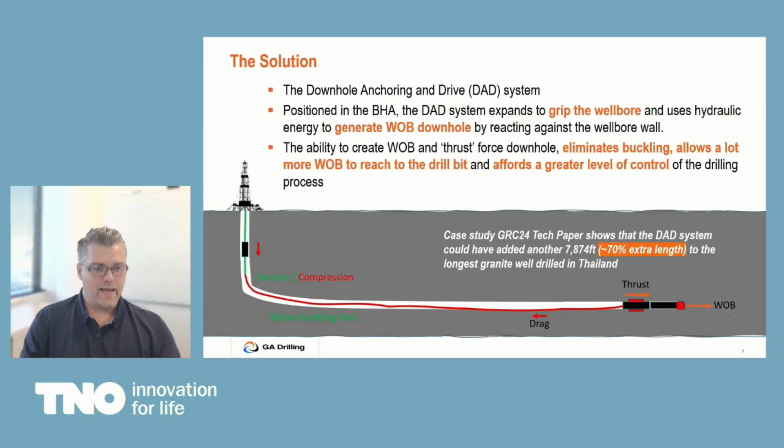A nice case study in a paper we published a couple of months ago at the Geothermal Rising Conference showed that by adding the downhole anchoring system into the bottom hole assembly in a well in Thailand, the longest granite well drilled there, this system could add an extra 70% of length into the lateral section just by the addition of that weight on bit downhole. That's massive for the ultimate economics of the geothermal prospects.

This is the system, one unit of it. The system comprises at least two. It's powered by drilling fluid, keeping it nice and simple. It has an actuation system inside that diverts some of that fluid pumped through the system to do work. It has gripper elements you see in the middle of the screen, those rectangular elements there. They are energized by the mud and expand to grip the wellbore.

Each of these units can apply about 30,000 pounds of thrust - about 12 tons. It can adjust that thrust up to 100 times a second to not only drill faster, but optimize the process and mitigate things like stick slip or other dysfunctions.

It has smart controls inside there and feedback so it can monitor what's going on in the drilling process and then adapt what it does to improve and optimize. It can also communicate via CAN bus to other systems in the drilling assembly - your MWD tools, your LWD tools, your rotary steerable tools - to find out what's going on for them, send data to them, vice versa, and then optimize the process ultimately.

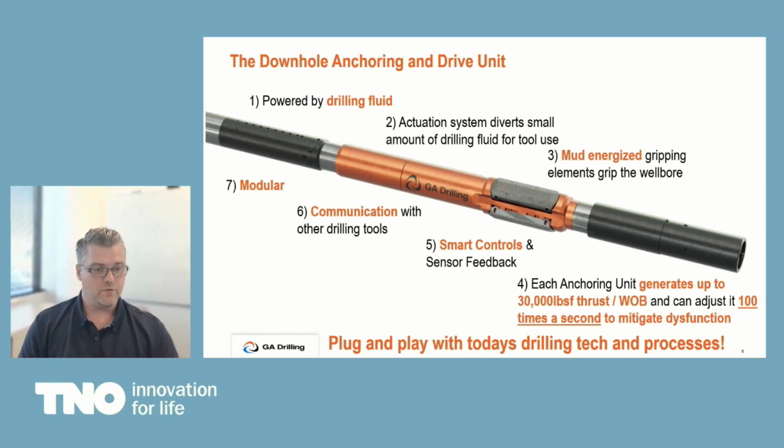It's modular, so you can put 2 of these in the drilling assembly, or 4 of them. It doesn't have to be an even number, but you need at least 2 to keep that continuous force and motion. The key here with this system, it's like any other downhole tool - it's plug and play for the most part. I can use any of the existing drilling technologies, a rotary steerable tool, a bent motor for directional work, and stick it in there. It's fairly agnostic and you just get all the benefits with no additional uplift in terms of complexity.

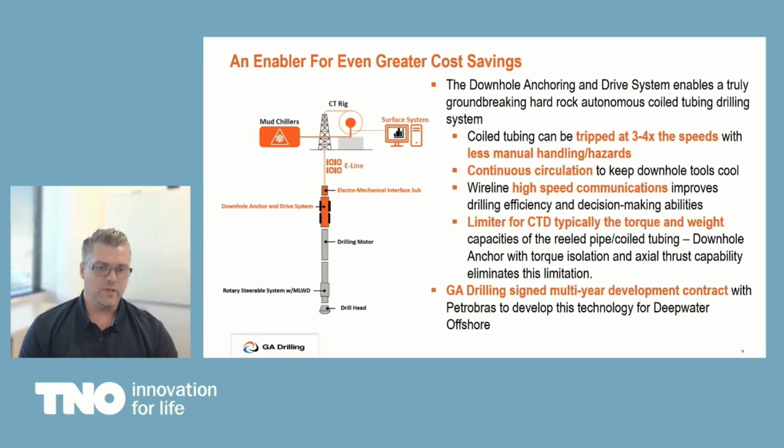So there's some great synergies there, talking about transition and getting conventional oil and gas companies involved. There's great synergy between what they do day in, day out - overcoming challenges, making it economical to drill - and what geothermal needs to really scale.

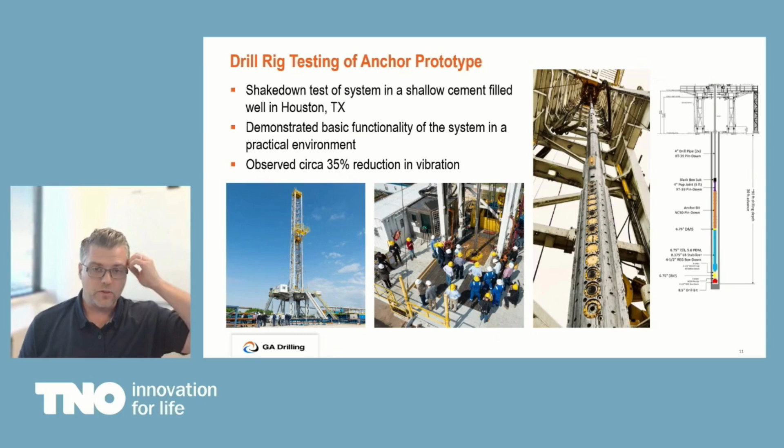Okay, we've built the prototype of this tool. These are some pictures of it being tested in Slovakia, where our headquarters is. We've also taken that prototype to our Houston test facility, one of our investors' test facilities actually, and tested it in a shallow well just to prove the gripping and anchoring concept, which we did. As a nice side effect, we also saw a significant reduction in vibration, just from the action of those elements gripping the wellbore and helping to stabilize the drilling process.

So in conclusion, to make geothermal anywhere a reality, we need to be able to drill cost-effectively, deeper, further, faster. Hard rock is hard to drill, namely due to those high energy requirements. Getting more energy density into the drill bit, or changing the rock itself through things like particle drilling, or something exciting we've got going on using plasma to pre-fracture the rock and then drill it with a PDC bit - they're all very exciting mechanisms to get through this.

Our anchoring system allows you to apply a lot more weight and therefore get a lot more bit engagement and a lot more energy into the drilling process. And that's what unlocks the geothermal resources.

So, increased drillable lateral footage. We show how thrusting can help extend the lateral reach - again, very key for the economics of geothermal projects. It can increase the rate of penetration through having higher weight on bit, and it can increase run length through prevention of damage to the drill bit and other downhole tools.

We didn't talk much about the optimization that this tool can bring to the system, but these optimizations can significantly improve the life of the other drilling technologies in the drilling assembly. Ultimately, longer term - three to five years out - this technology will be an enabler to coil tubing drilling for hard rock, which can really step-change the cost of geothermal drilling.